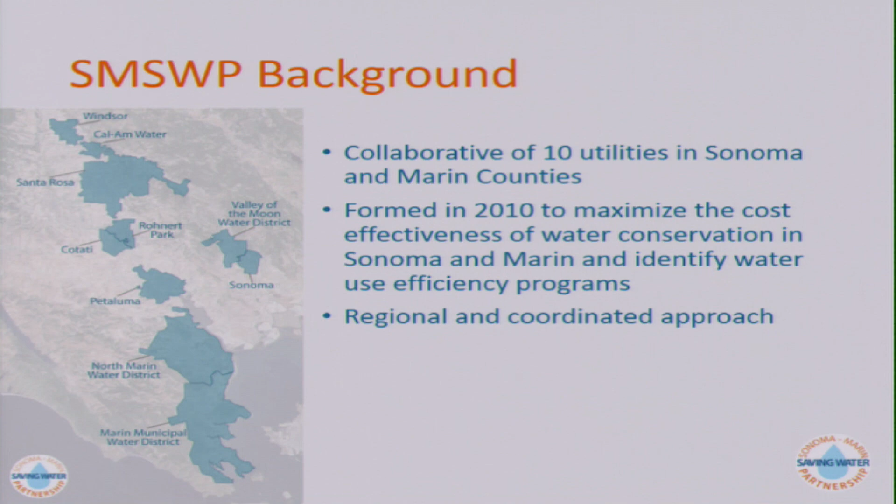And that's why we're here today with these landscape template plans, because as you know, the fires affected a great area of Sonoma County. So people in the California American Water District area, as well as Valley of the Moon, in addition to Santa Rosa, have use for these templates.

Our landscape template goals are to support our community to recover from the fires and also to create plans and specifications that are cost conscious, because we all know that your insurance and coverage and things like that are not going to cover everything. We want to make sure that the landscapes comply with WELO, the Water Efficient Landscape Ordinance.

We want to encourage Russian River and Bay-friendly sustainable landscaping practices. And we also wanted to provide design options for green infrastructure elements, such as stormwater management, rainwater harvesting, gray water, laundry to landscape, etc. And we also want to increase the number of water-efficient landscapes in Sonoma and Marin counties.

So with that, on today's agenda, we have some presentations. We'll have a presentation with Ann Baker, who is the landscape architect who designed the 8 landscape templates. We will also have a presentation from Sean McNeil, who will go over some details on how to modify the plans, and we'll also have a few words from Gabe Osborne from the planning department about the plan checks that are available here today.

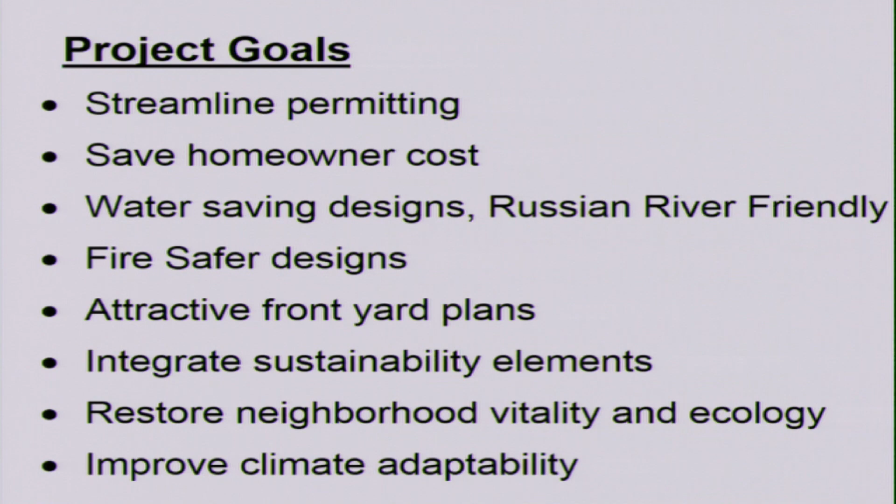As Brian mentioned, these were our project goals. One thing I want to add is that all the designs are fire safer. We were integrating sustainability elements to restore neighborhood vitality and also improve adaptability to climate change.

With reference to that, what we see coming from research with regards to local climate change is warmer conditions in summer and winter, and the North Bay region becoming more arid, meaning our dry season is longer, and rainfall likely to be more variable and flashy, so maybe more intense storms, more flooding, but then also more periods of drought.

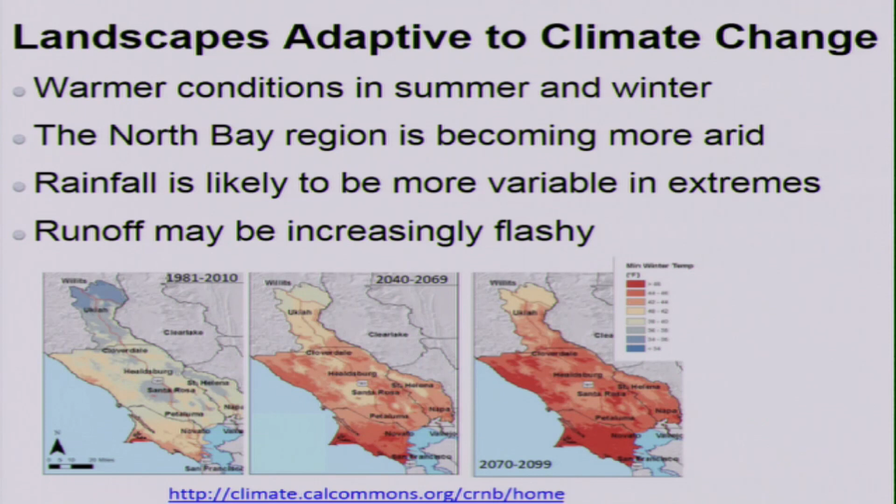So when we do sustainable design, we back up and look a bit at the social historical context and the ecological context. I'll give you a brief example of how we do that. We look at the period of neighborhood development, soils, drainage, impervious cover, and the characteristics of the existing urban forest. Going forward, we want our landscapes to improve on these statistics.

Here's a graphic of Coffey Park, and the blue is houses, which are impermeable surfaces. Red is road, and buff is other paved surfaces. Overall, Coffey Park was roughly 60% impervious, meaning that rain couldn't penetrate into the soil water bank.

Is everything okay? Yes. Okay, thank you.

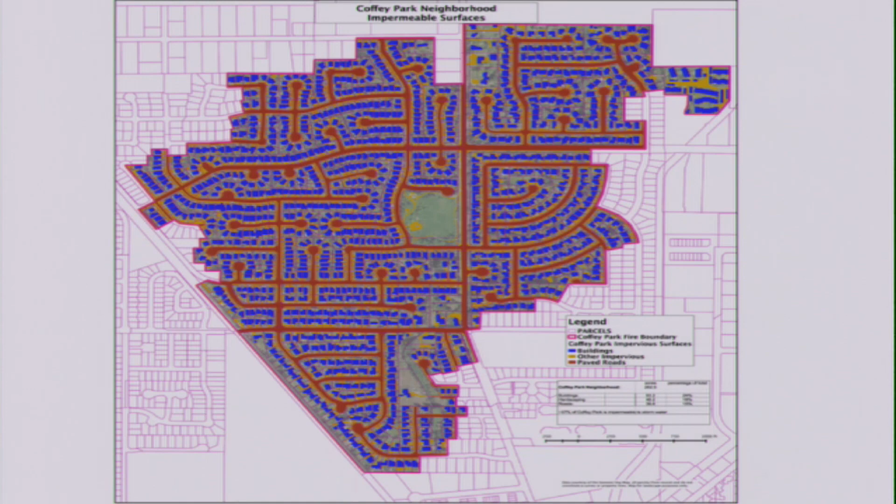The key point is that within 5 feet of the house, you want plantings to be under 3 feet tall and low fuel. That's a little opposite from the kind of foundation shrubs which are more typical in previous landscape designs.

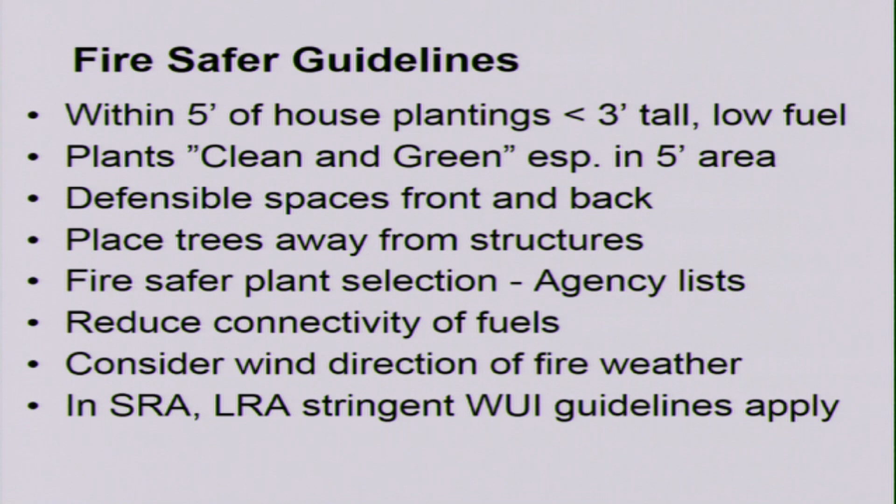You have a clean and green landscape palette throughout your site. You're looking at defensible spaces front and back, and pulling trees a little bit away from the structure so you can avoid having them overhang your roofs, reducing the connectivity of fuels, and thinking through fire weather in this community.

The sustainable design elements that we looked at in particular were permeable paving, disconnecting downspouts and paving so we didn't have downspouts running directly out into the street and into the storm drain system, and we used rain gardens and swales in order to bring the water down into the earth and bank it into the soil.

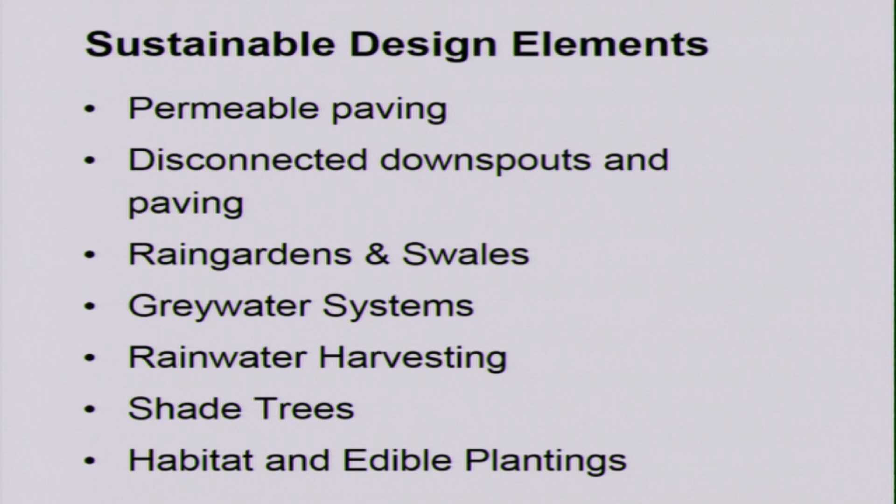We introduced two types of gray water systems that could be adapted into your properties, and have a rainwater harvesting sample detail, and we have shade trees and habitat plantings.

So this is the general approach to treating water on your site: you try and slow it, spread it, sink it, and bank it in the earth.

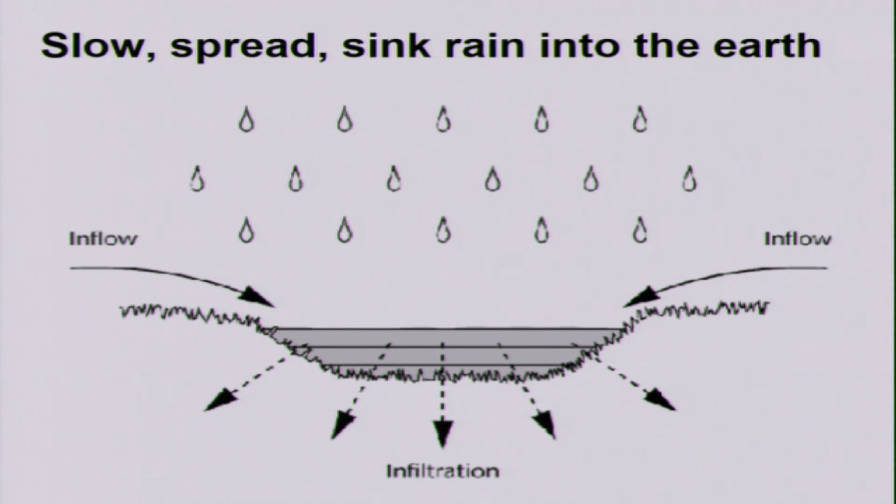I should say this slideshow is available in a PDF, so you don't have to take notes. I'm just going to zoom through everything and try and let you know how we arrived at the designs and the important components for you to consider for your own yards.

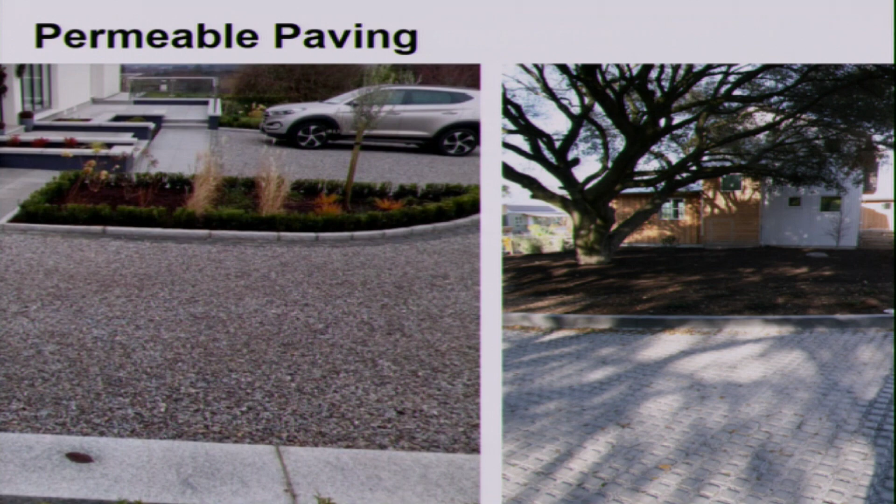Here's some examples of permeable paving. It's an aggregate paving system, with a plastic cell underneath, but you just see the gravel on top. This is a different type of permeable paving with small concrete cells filled with gravel. Here's a unit paver driveway, and in the back it has just a gravel area. So you can use different types of permeable paving on your site.

Here's a sample of the simple laundry to landscape gray water system, a diagram from the Santa Clara Valley Water District. I have this system at my home - it's awesome, it waters all my fruit trees, and it's very simple to operate, coming right out of your laundry.

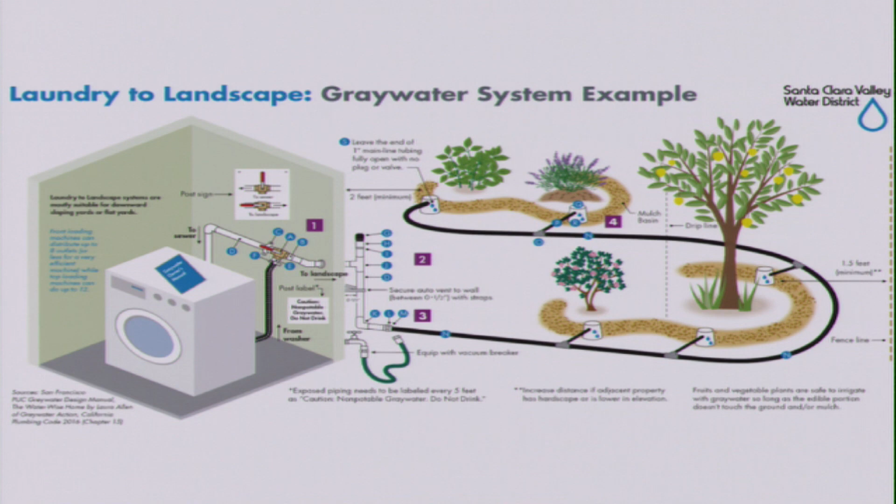The specific landscape permit requirements that the templates need to meet are - the main one is that the front yard needs to be less than 2,500 square feet.

Every yard needs to have smart irrigation controllers with a weather sensor, so they're turned off if it rains, and 75% low water use plants. All the templates have drip irrigation systems, which are easy to expand and contract, so they're easier to work with, and owners self-certify and simplify the inspection.

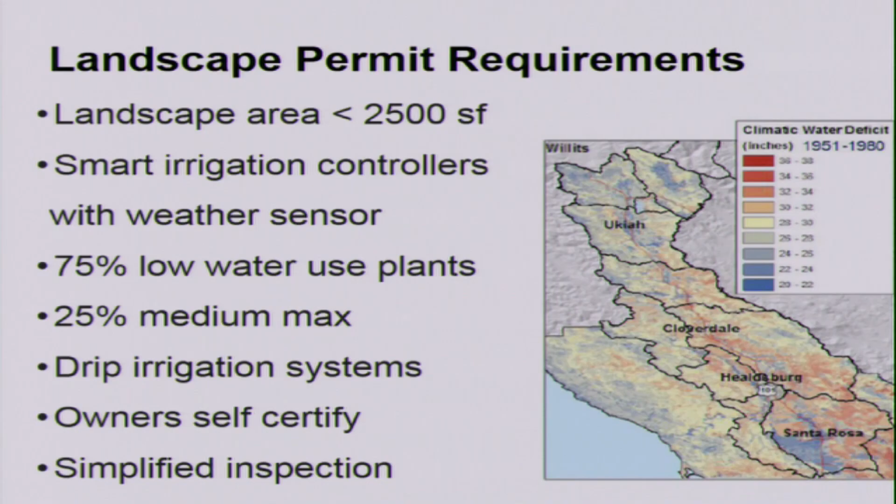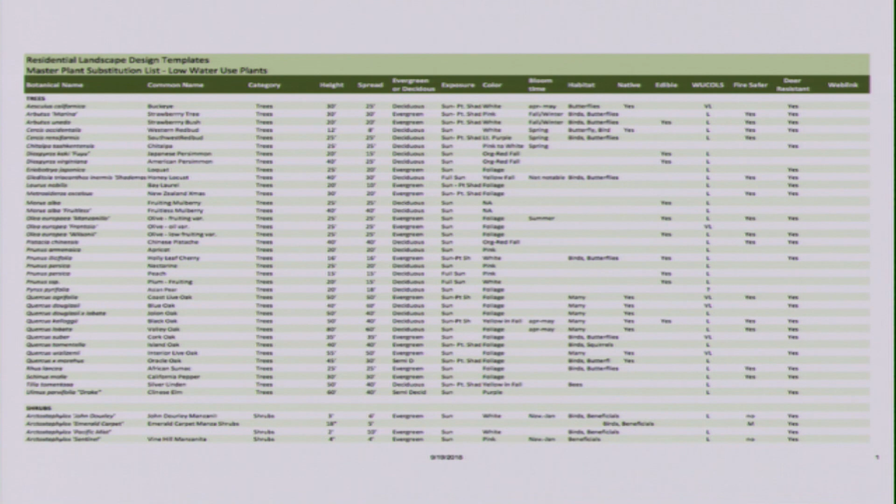Here are the 8 styles of gardens that we created that are on the Sonoma-Marin Saving Water Partnership website, and you can select the concept plan, the design template, and the cost opinion.

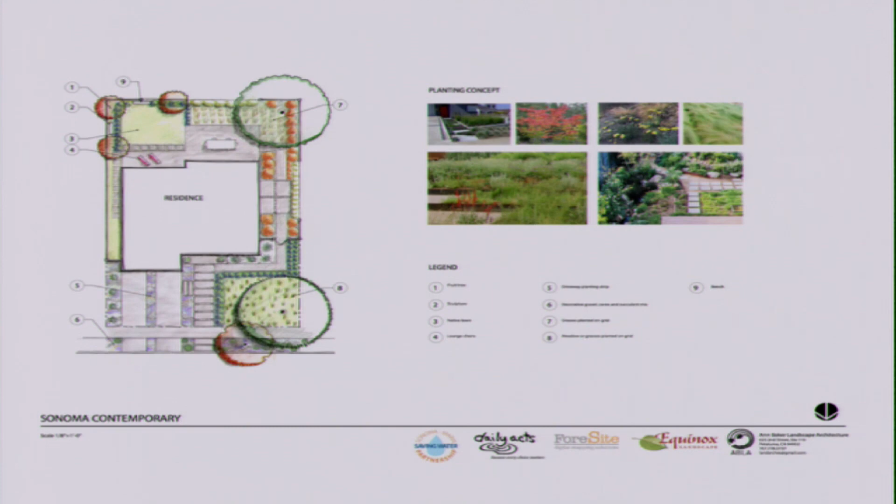Here's some examples of the plans themselves. This is the contemporary with clean lines. Here's a native adaptive, with more curving lines. There's a pollinator garden and a bird habitat garden.

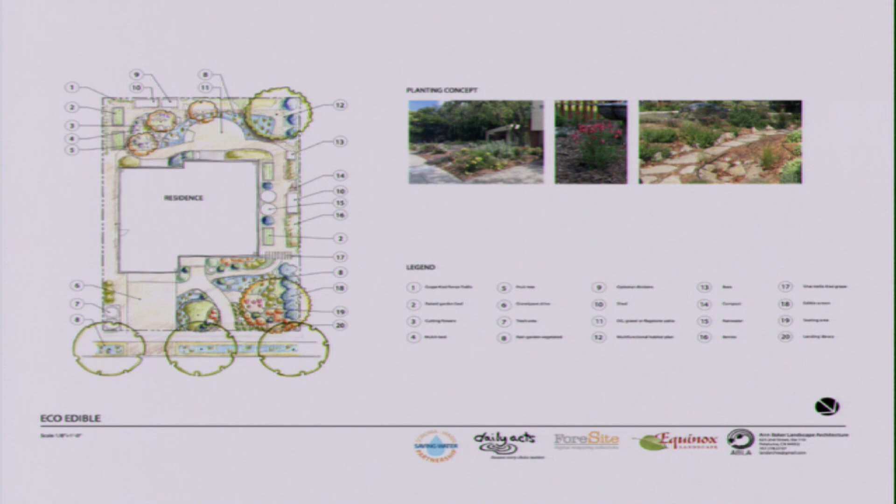All of the designs have rain gardens on them. This is eco-edible - there's the rain garden there and another one there. This is the cottage style, which has more swaths of color and a more traditional design.

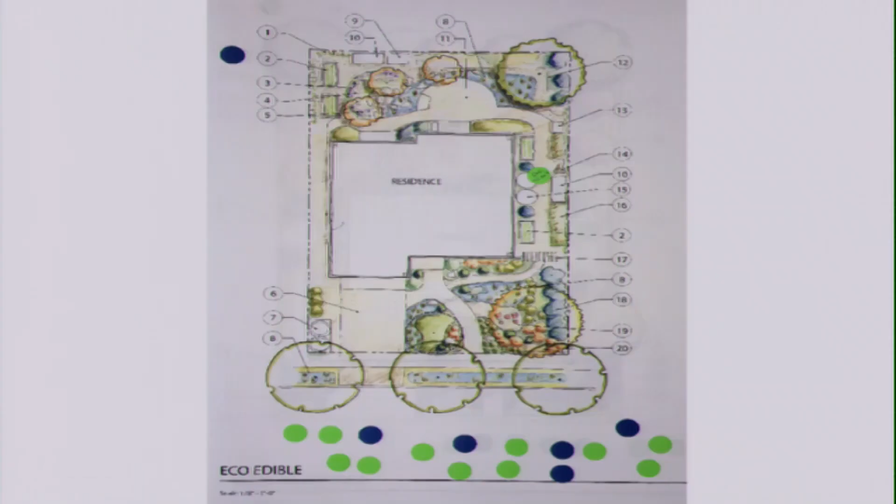We vetted all these concepts in community meetings. So here's the first one - we did a presentation, got people's feedback, and sat around the table getting their feedback on the specific designs. We had people put dots on things that they liked in green and blue, and things that they liked but found difficult to implement, where they wanted support implementing. So that's all the feedback we got.

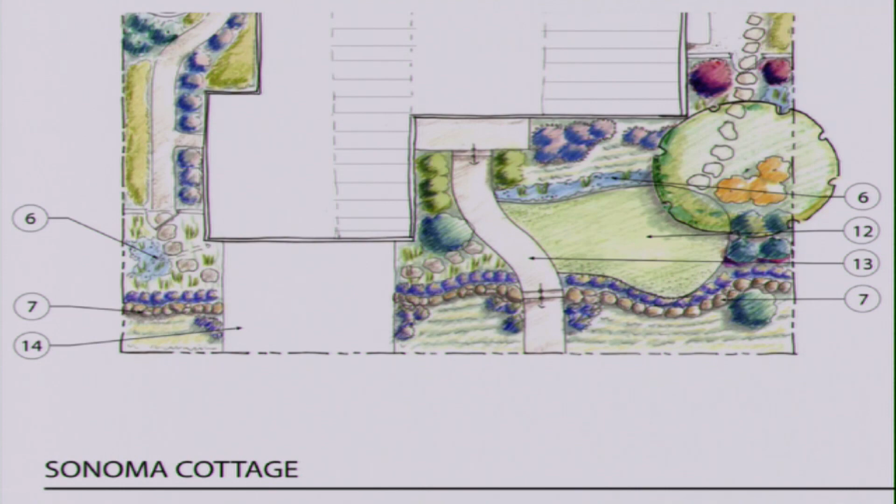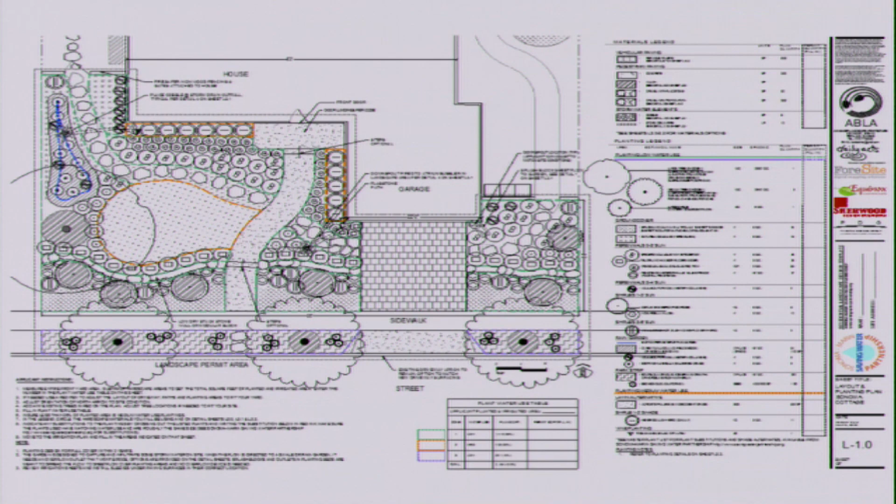The templates are flipped, so if your driveway happens to be on the other side, you can use a flipped version. And then the second drawing is the irrigation drawing. This one also has the same summary water use table, and that's the main thing you need to fill out on both these pages.

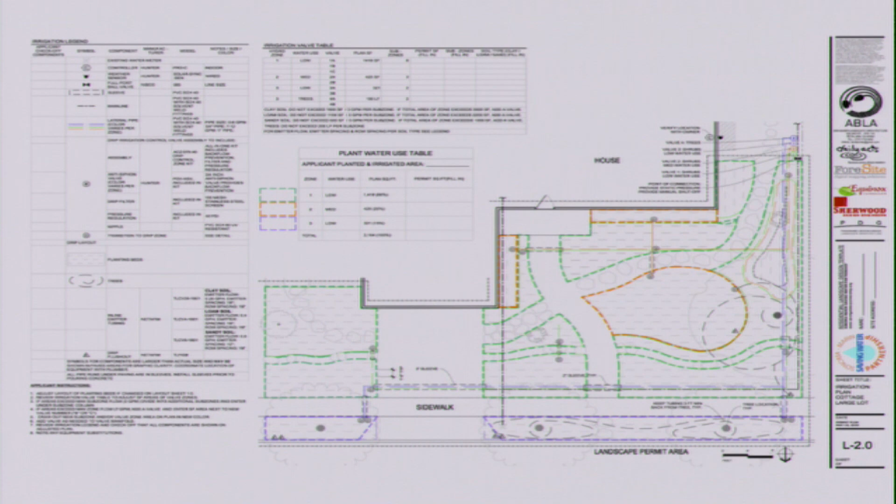You would adjust - Sean will go into this in more detail - but the outline of the hydrozones, the low water use and moderate water use areas, are adjusted to fit your site, and it shows how you use the drip irrigation for the trees. There's a whole list of drip irrigation components that are specified for you, but you can also use 'or equal.'

I'm going to zoom through this because it's not that exciting, but it's all the details we've provided for you that are meant to save you money and help ensure you get a quality installation from your contractor. So you'll have details for irrigation, details for planting, details for paving and for rain gardens - how to build all this stuff. So even if you find that the template doesn't fit your site perfectly, you can still use all of these details, and they'll save you time and money and help ensure you get a good quality installation.

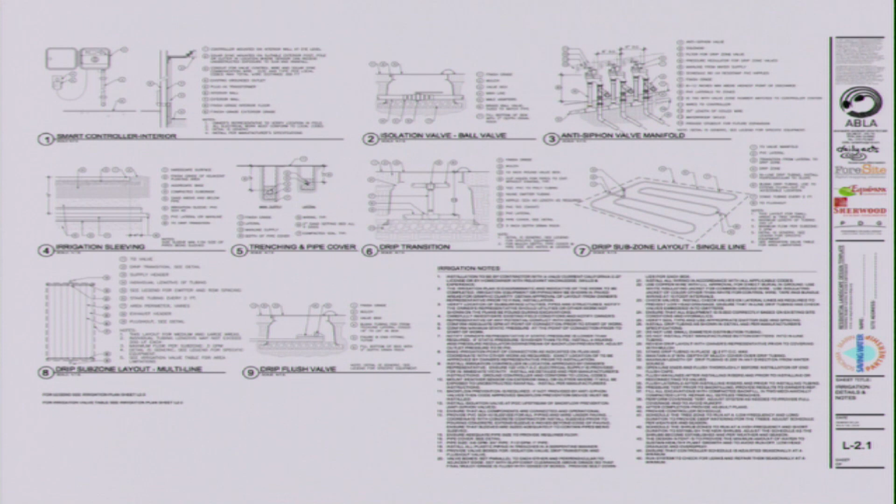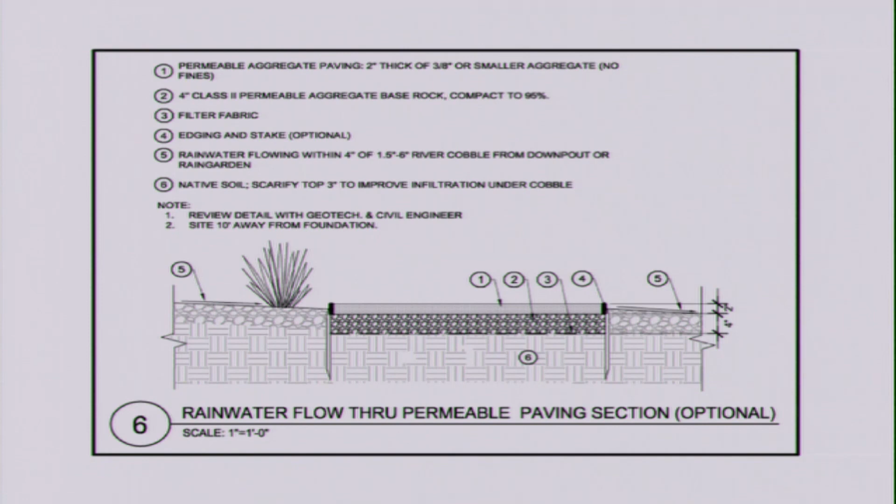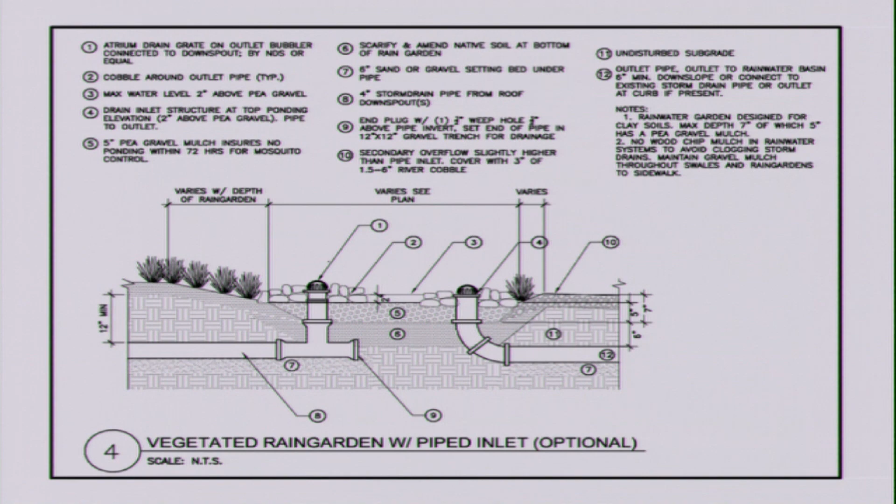This is kind of an option for doing overland flow. So you could do a splash block to a rain garden, and it'll flow through a permeable path. Or you could take your downspout into a pipe and have it pop out in a rain garden with an atrium bubbler, and then take it again into another atrium bubbler, down into another rain garden. There's stabilized aggregate details.

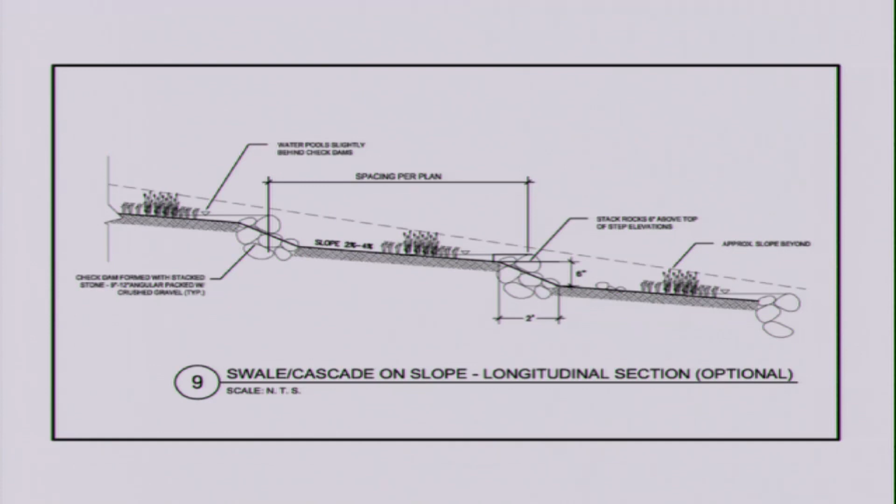There's a drainage sleeve through any type of paving that's specified, so that's something you can just buy off the shelf and put in your site where you need it. There's how to build the swale on the slope, and paving details for your driveway, like this gravel paved one, which was the first aggregate paving I showed for the driveway.

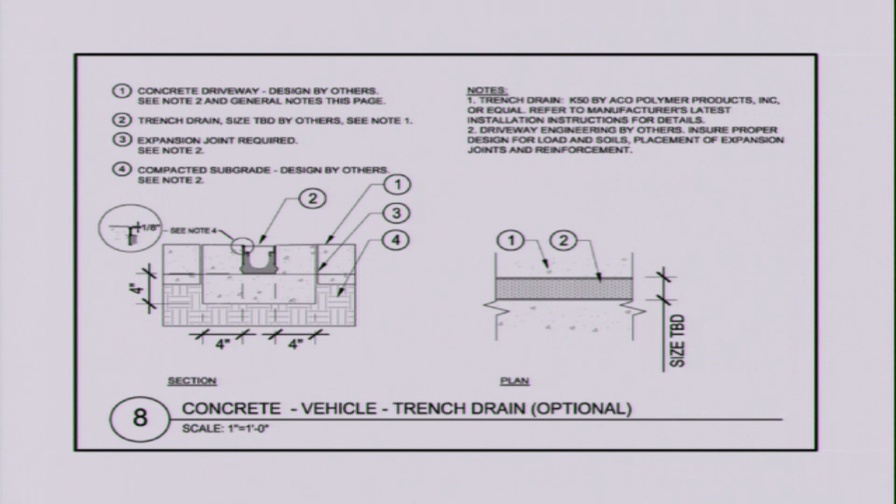And if you already have a concrete driveway but you want to harvest some water off it, you can use this trench drain detail to take the top half of your driveway and put it into a trench drain, taking it over into your landscape.

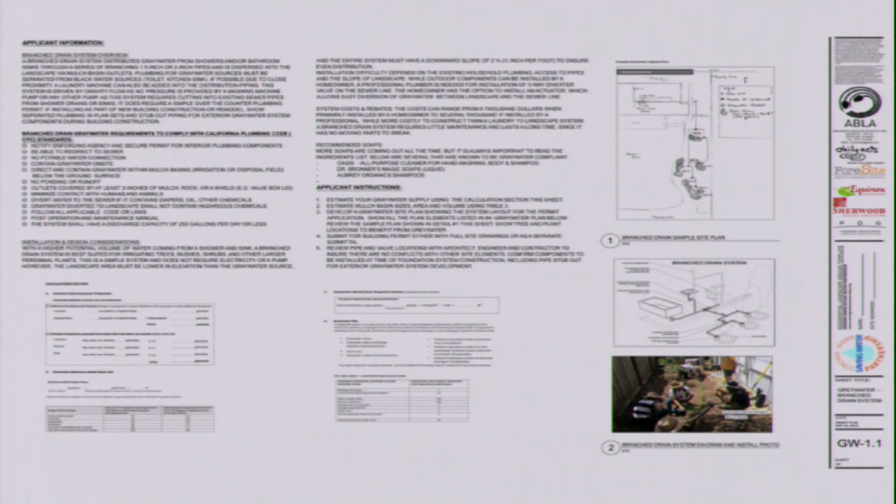So there's a lot of details here for you to use: the rainwater harvesting one, the gray water, and the branched drain gray water. Those are all the templates that you can choose from. And that's pretty much my presentation.

We're going to look at this workshop schedule, but now I'm going to introduce Sean McNeil. He's going to come up and tell you in more detail how to adapt the templates to your site. Thank you. All right, thank you, Ann.

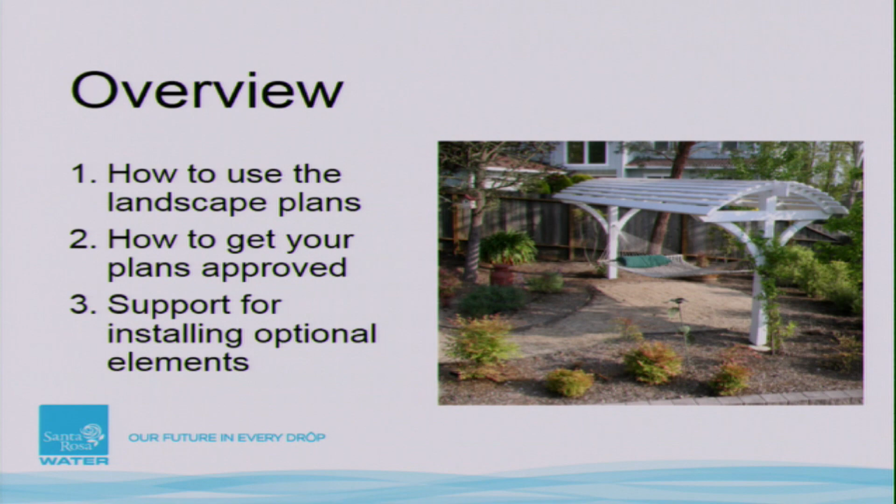So today I'm just going to go over a few things. I'm going to walk around a little, I don't want you guys to feel left out, so I have a microphone so you could still hear me. We're going to talk about how to modify the template drawings for your shape and lot size, how to expand or shrink the plans, and how to adjust the plants.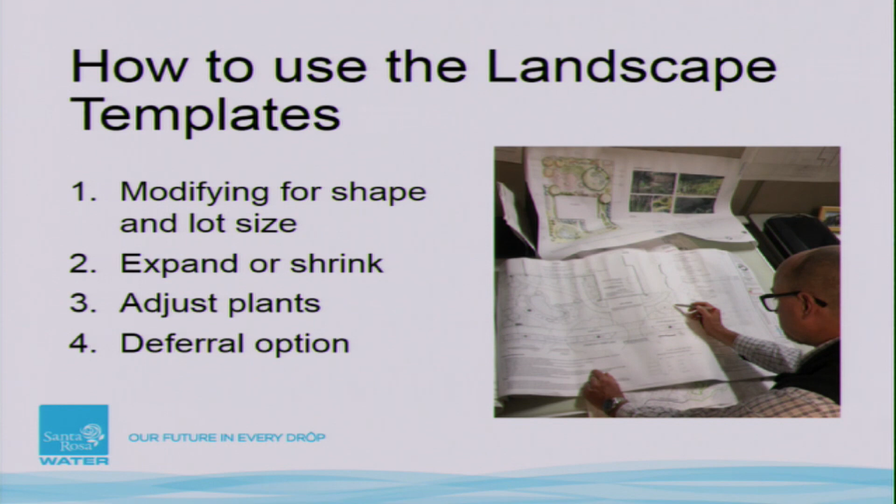And then I'll go briefly into the deferral option for those of you who are in the City of Santa Rosa. It's a specific option that we're providing for people who want to be able to move right into their home. So I'll talk about that towards the end.

So the first thing you want to do when deciding to use the template plans is pick the plan that best fits your aesthetic. Try to avoid just picking the plan that looks the most like your yard. It seems like that would make the most sense, but it's not, because you want to use the design that is what you want your landscape to look like.

If you start there, then you're going to start with the best design, and then we're going to help you figure out how to adapt that design to fit into your landscape shape.

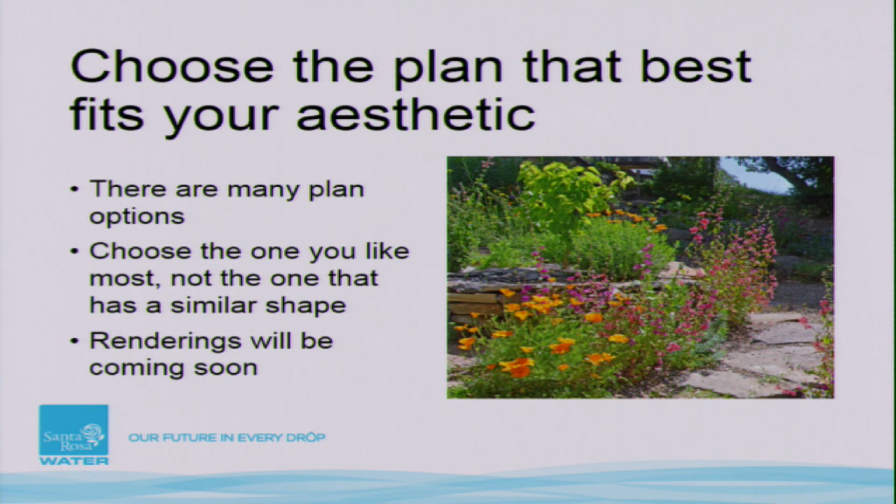We will be having renderings coming soon. I know for those of you who are going to be working on your plans today, you'll have already chosen which design you want, but we'll have renderings—these will be 3D or two-dimensional pictures of what the landscapes fully installed will look like.

So when we use the templates, the first thing you need to do is print out full-size sheets of sheet L1 and L2. That's 24 inch by 36. L1 is the planting plan, and L2 is the irrigation plan.

Then, if you want, you can print out the other full-size sheets as well, but we've also recently made available on the Saving Water Partnership website the 8.5 by 11 details, and you can print those out.

And so those you'll need, and you'll draw in any difference in the lot shape and add and subtract features to complete the design.

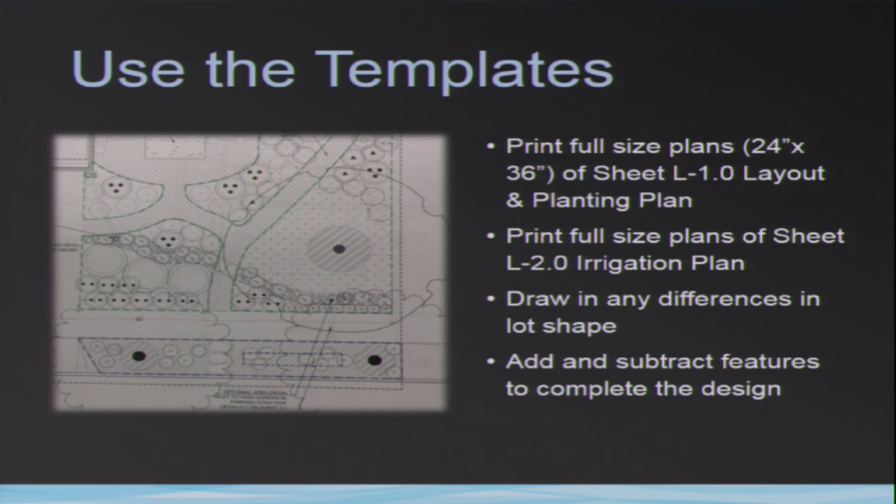So to expand the plans, this is the most critical step. If you're going to expand, shrink, or change the design to use this pathway for compliance with the Water Efficient Landscape Ordinance, the state requirements, you have to have...

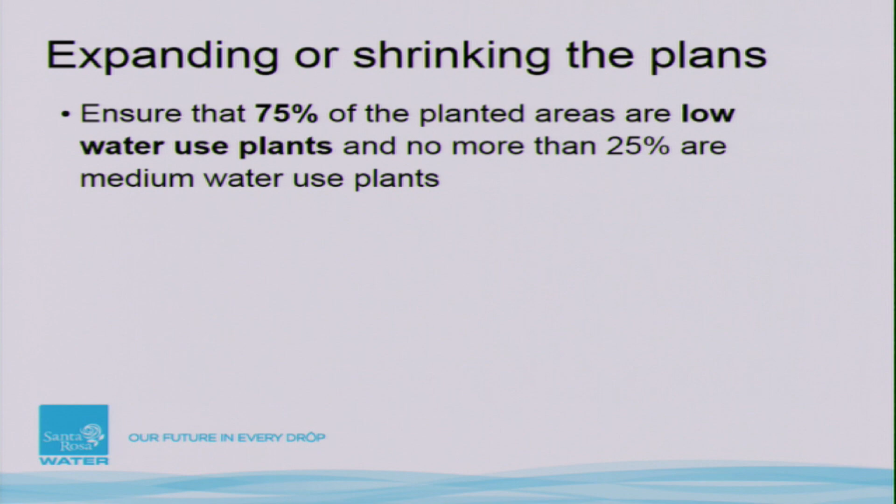75% of the planted areas have to be low water use, and 25% could be moderate. So any changes we make, we need to come back and make sure we're keeping that in check. And the plans, as they are designed, all meet that criteria, so we just want to make sure any changes we're making maintain that.

So what we'll do to make sure of that, we'll calculate the landscaped areas for each zone, each area, and fill that in. The full-size plan sheets have tables where you put the data, and it's real simple to just follow through—it's almost like a 1040 EZ form.

Another thing these plans do is make sure that if you follow them, you're not going to exceed the capacity of the irrigation system through your design. We have that all built in, and if you just follow the steps for any changes you make, you'll have a real simple way to build your landscape irrigation that won't fail.

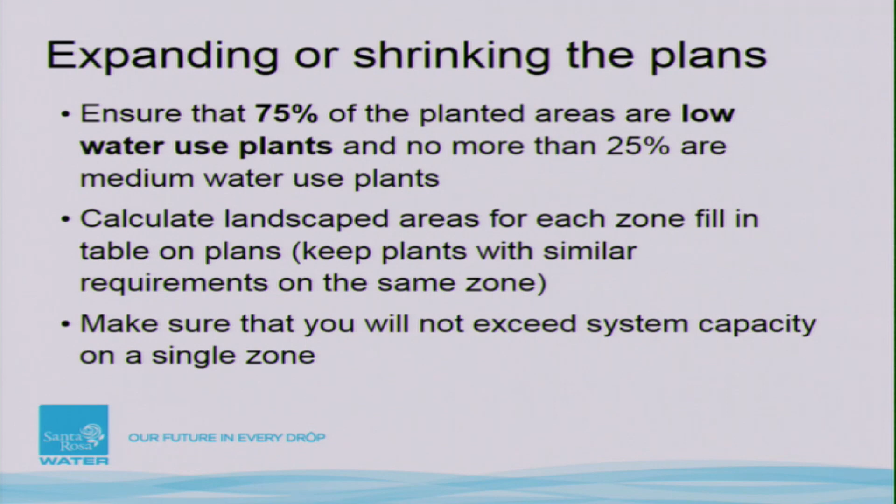So when we modify for shape and lot size, here's an example. I've changed the lot shape, using a red pen so it stands out more on screen. Now I have more of a pie wedge shape. See that pie wedge shape? And I removed a bunch of plants because they're no longer on my property.

That makes sense, right? I had to remove those plants, so I just X'd them out. I have a tree here, on the border of my property, so I just moved it over and drew that in. See my round circle there with the dot? That's my tree. I moved it over, and that'll stay there.

This pathway that was drawn here, I took that out—it wasn't going to work for me. So I X'd it out, made that really clear. That's a very clear example of my intention, and that's how you can modify the plan. You can turn in something with that kind of markup showing the changes to the template drawing and what you're going to do.

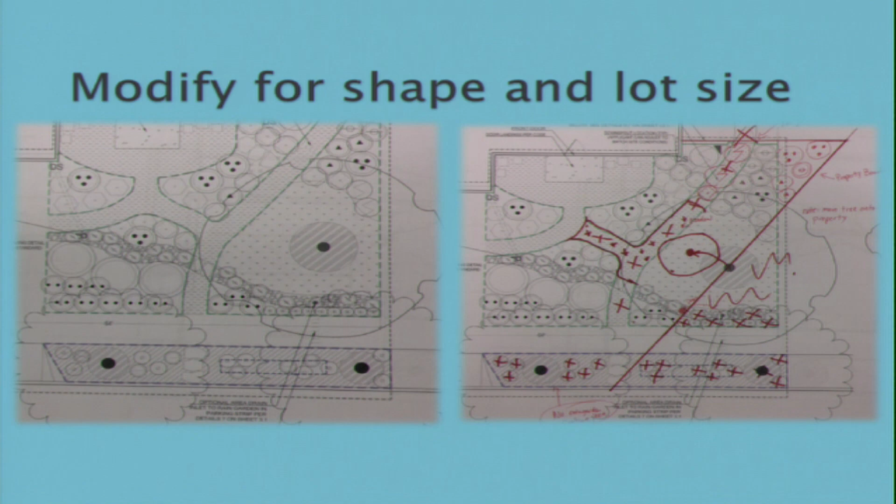Over in this area, you can see I've added plants. There were some plants in the design that I liked, so I added a couple more in that area, and X'd out the ones that were there originally in the simple plan. We'll come back to this example again when we look at the irrigation plan—I'll use that exact same example.

If you do change plants—I don't necessarily suggest you do—but if you want to, it's really important that low water use plants get swapped for other low water use plants. It's critical that you get similar types, so you don't want to swap a ground cover for a tree. It wouldn't really fit within the design, so you want a similar type plant for any swapping.

Things that can change: maybe when you readjust for the north arrow, the plan you chose is more full sun, but you want something similar with more shade—you could use the plant list for that. Or if you like a different color, you can change it for that. Ultimately, when you go to build these, if the exact species isn't available but there's a similar one, you'll write that in on your as-built, making sure we're using the same water use factor for these plants.

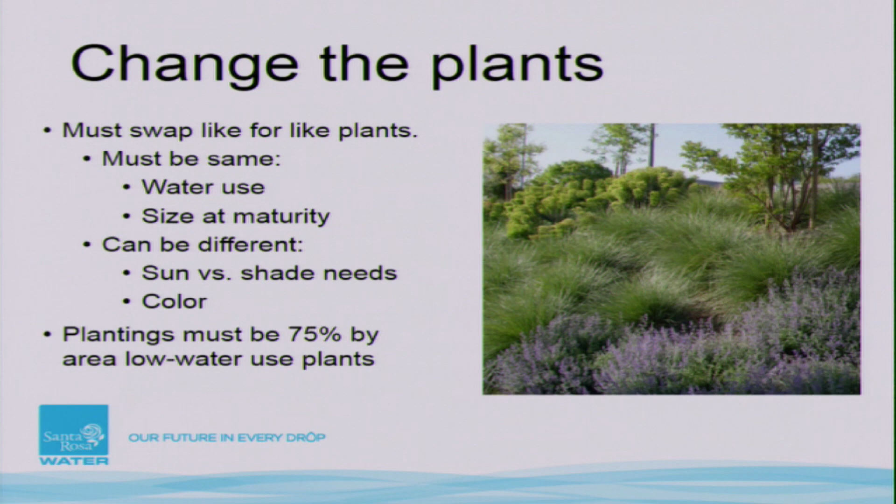Once again, because it's most critical, I'm going to repeat it: plantings must be 75% of the landscaped area when we're done, and must be low water use.

Anne talked briefly about the plant lists—these lists her team put together are incredibly powerful. There's a low water use plant list and a medium water use plant list, broken out into tree, shrub, grasses, etc. They also tell you exposure, what type of sunlight the plants need, and show color and size at maturity. These are all really important factors when figuring out which plants to substitute in.

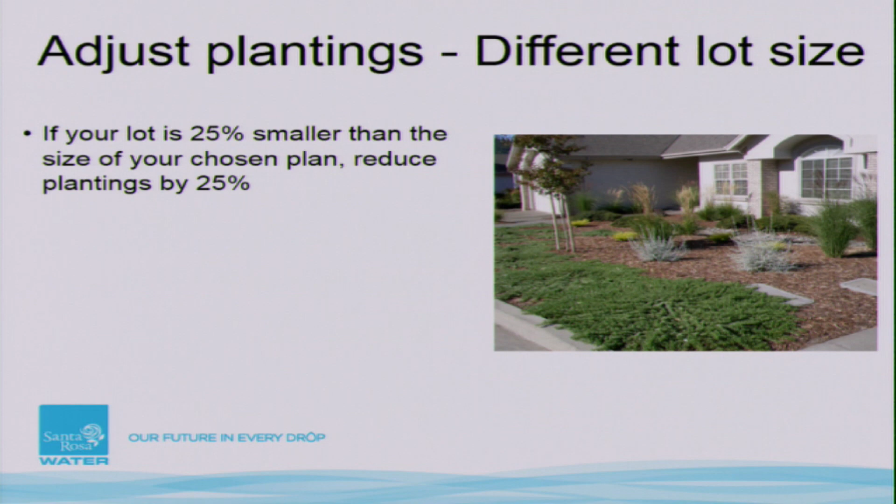And there's much more on the list. So when we adjust the plantings for different lot size, just a rule of thumb: if your lot is 25% smaller, you're going to decrease the overall plantings by 25%. If it's about 10% larger, you'll increase your plantings by about 10%.

But I also want to speak for those of you in the city of Santa Rosa. There has been concern that some of these plantings might be a little too expensive, and ways that people could cut back on costs would be to reduce the overall percentage of plants in the landscape. So you can take up to a 50% reduction in the number of plants you install, but you're going to do that not by broad number, but overall density of plants, so you can't take out all the big plants and leave little ones.

This is a little more challenging on the maintenance end. It may be savings at the installation phase, but eventually all those open spaces will be places you'll have to weed. Whereas if you plant the densities in the plans, they'll self-fill in and you won't have to worry about weeding as much later as they mature. So though this is allowed, I would still suggest using the full density. The savings isn't that great overall with the cost of things for the number of plants, especially if you have a small yard.

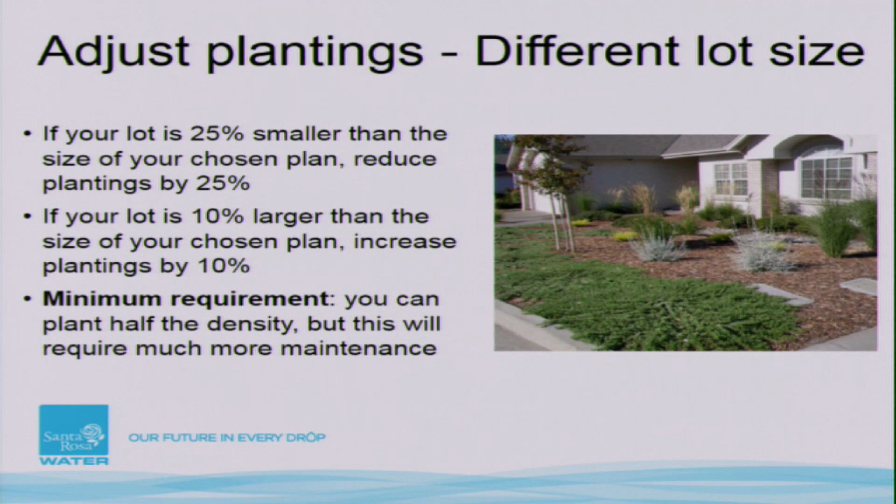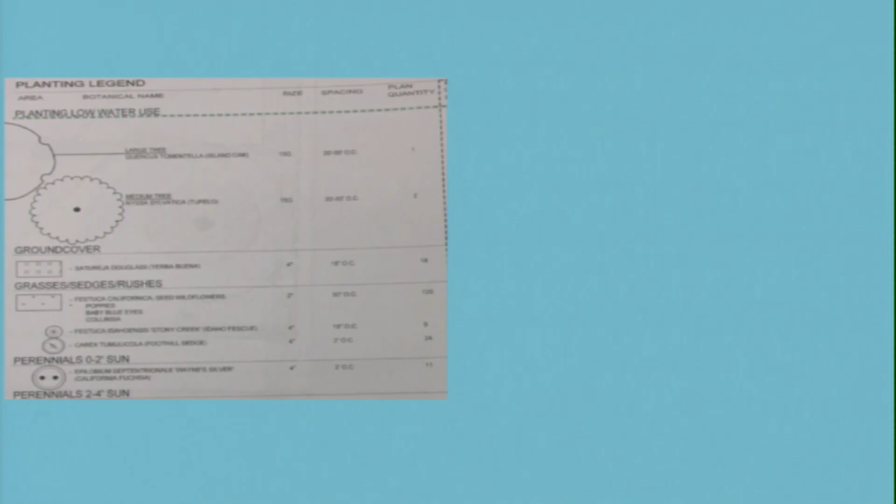Something to think about. Just reminding you of this change we made before I move into the irrigation plan. Oh, and the tree plant list.

So on the planting plan, I told you I wanted to make some minor changes. This might be hard for you to see, but I had here an island oak, and I changed it for a valley oak, just because I love the valley oak. I changed it out for a valley oak, and all I did was write the name in and put it there.

Also, because I had some plants in the plan that, when I redrew my plot line, were not even in the plan anymore, I just scratched them out completely—just a red line right through it. You see that over there? Just a red line right through it. And for others, I just changed the number because I had a smaller area where those plants were kept, so I reduced the number.

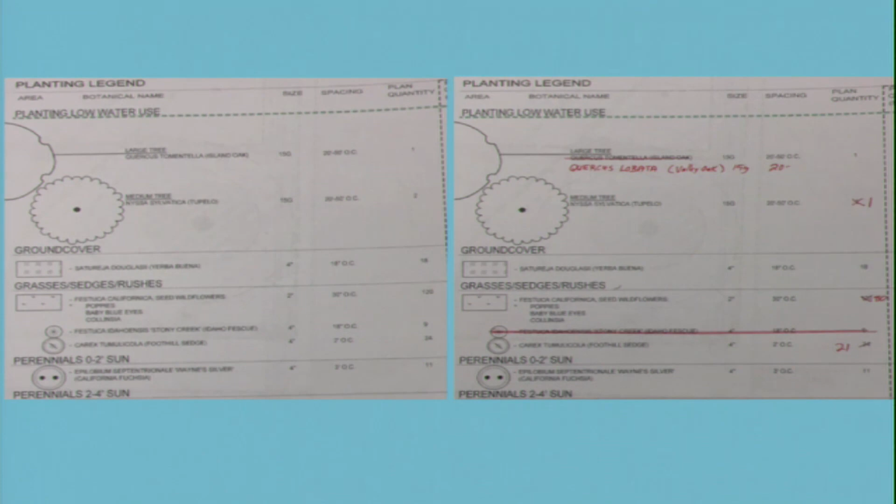Now I'm going to adjust the irrigation plans. Getting back to this example, this is the planting plan adjustment. Now I want to look at the irrigation plans, and here's that path. What I've done is in that path area, I've put the same symbol as this meadow area. That tells you I'm planning to continue the meadow into that area instead of having the path, because I wanted to maybe have some stepping stones, not a full path, to the backyard. I like the meadow look, and walking through a meadow sounds nice to get to the backyard. That's how I wanted to do that.

Also, I want to point out that I have these sleeves here. Originally the sleeves were over here, out of the property. Sleeves are pipes under hardscape that allow me to fish other pipes through them, so I can put my irrigation underneath hardscape. So when you don't have the hardscape in, that's the right time to put sleeves in. I have sleeves there, a sleeve through the pathway here, and a sleeve through the driveway.

Usually it's a larger size PVC pipe, 2 to 4 inch, depending on how many pipes you have to fit through there. Any time you need to get a pipe through hardscape, or if a pipe breaks at some point, it's a lot easier to make changes if you have them in a sleeve versus just direct burying them under hardscape.

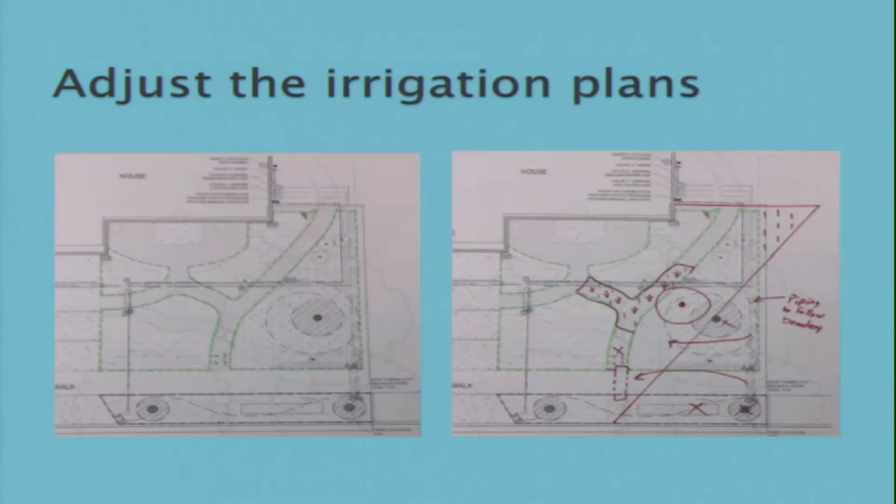The other thing I've drawn in are these. I moved the controller, it was right over here, and I moved it into the garage. I'll show you guys that. So the controller is in the garage, but I had to create a wire path.

I need to get the wires from the controller to where my irrigation valves are located over here. So I put that right in the same trench where I'm going to have my pipes going, through the same sleeve, right underneath this path back to there. I've drawn that in because you don't want to move your controller and figure out how you're going to get the wires over there after everything's put in.

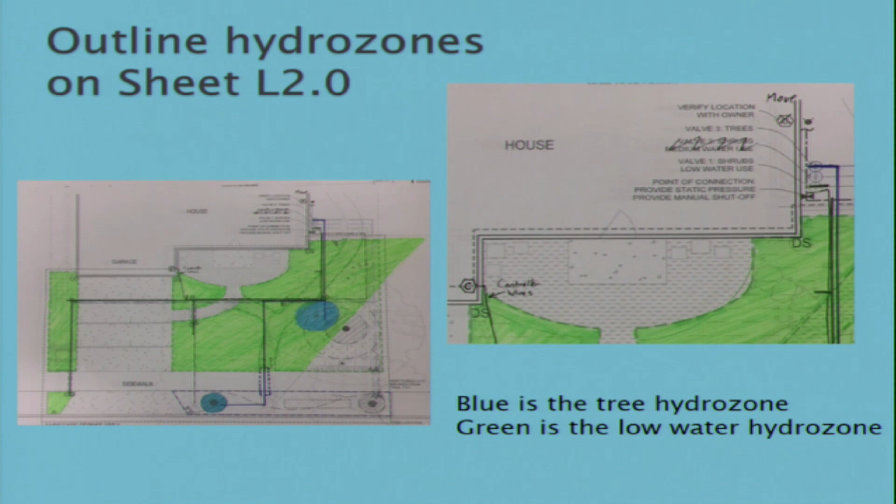And then I've also moved my pipes, and for detail, I'll show you in a minute.

So now we need to calculate the landscaped area. There are two different ways to calculate this. Some of you might already know how many square feet your front area is, and then you can use this formula. If you already know, take that total landscaped area and add to it the tree canopy.

For simplicity of this workshop, we're going to bin all the trees into categories: a small tree, you add 50 square feet; a medium tree, you add 75 square feet; and a large tree, you add 100 square feet.

And once again, we need to make sure our percentage of low water use plantings in this area is still 75%. So we take all the pathways, all the hardscape and special landscaped areas, subtract that from the total landscaped area, and that gives us our total front yard area and our landscape.

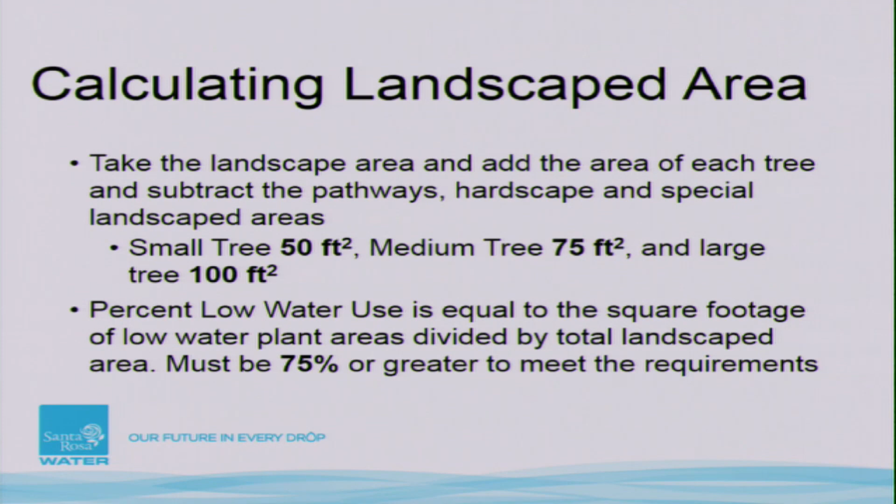So let's walk through how those calculations would look. My front area in the example I've drawn is 1,550 square feet. I have one large-size medium water use tree, so I add 100 square feet for that, and one medium-sized medium water use tree at 75 square feet. When I measure up the path and front porch, I get 335 square feet.

Then when I measure the other area, not including the trees, I have 1,215 square feet of low water use plantings. So there's the calculation of my total landscaped area. You can see the total front yard right there, 1,550. I've added the 2 trees and subtracted the hardscape and unplanted area to get a total of 1,390.

This is important because you're going to put this in the plans, and this is what you'll use to calculate how much percentage of low water use plants you have. So this is why I'm going over this. My low water use landscape is 1,215 square feet, and the percent low water use is basically this division problem times 100.

I didn't put that in because I wanted it to be—I get 87%. Medium water use trees is 175 square feet, and that's 13%. So I've met the requirements in my changes. This is a good looking plan.

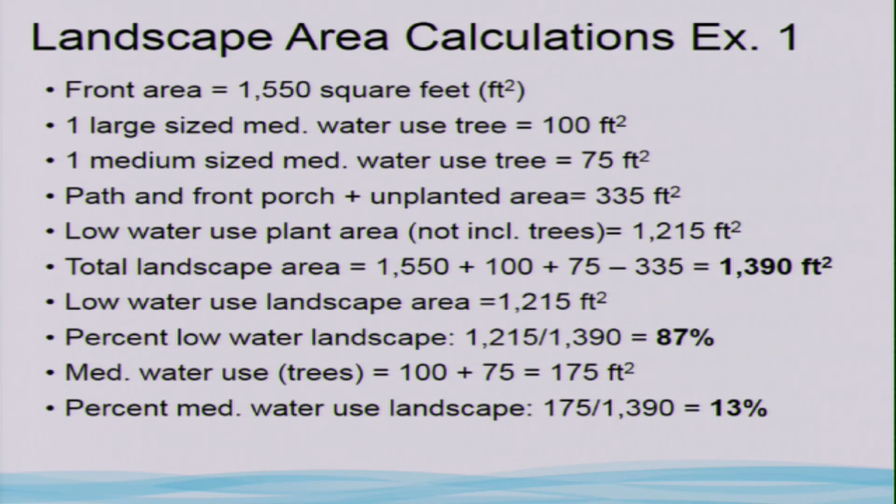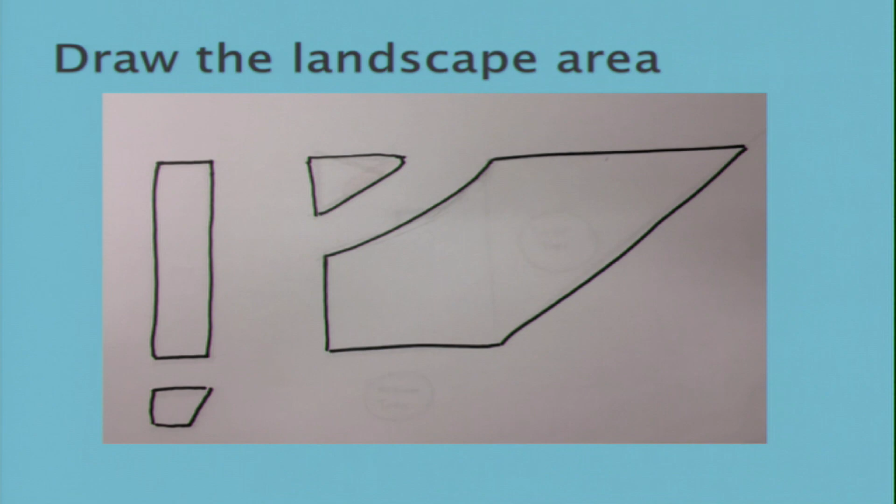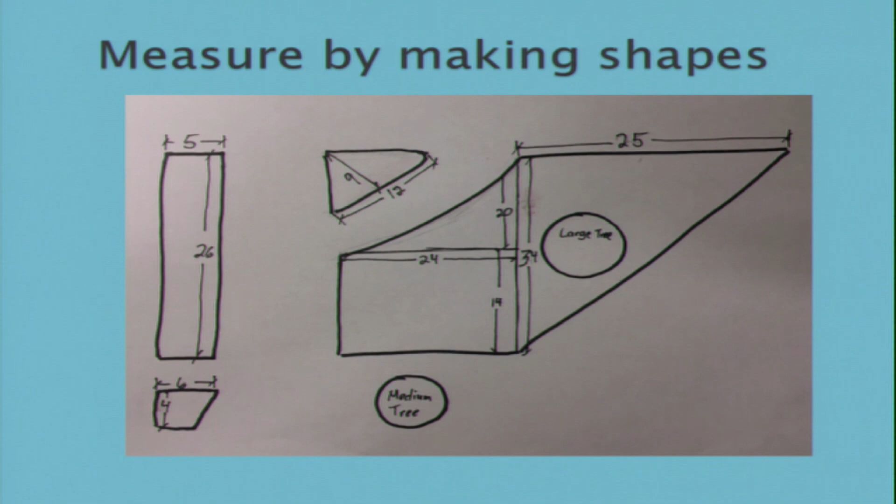Here's another way to do it. For those of you who don't know how much square feet you have in the front, you can start looking at your landscaped areas—that's what I've done, drawing out the landscaped areas in shape form. Because I like geometry, I broke them out into shapes I can measure. I know how to figure out the area of a square, a rectangle, and a triangle pretty quickly, so I've done that here.

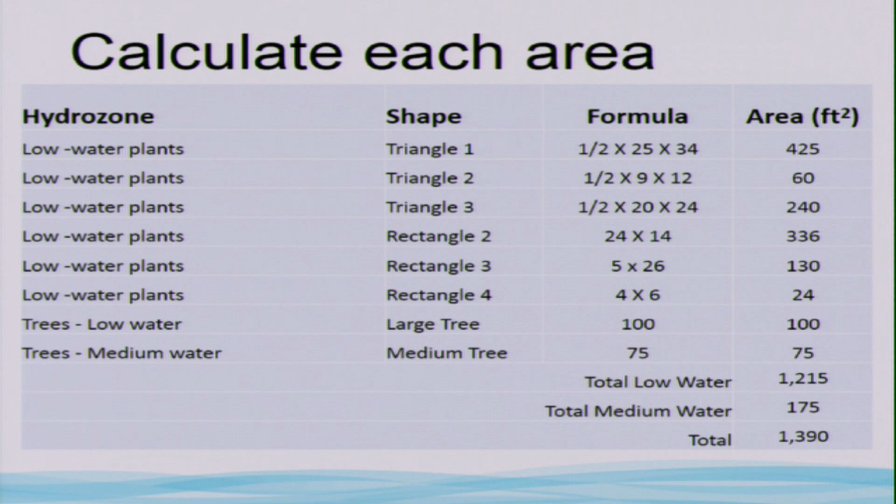Here's the calculations for that. I won't walk you through it all—you have this handout, if you want to double check my math you're welcome to. But I end up with the same number and the same percentages doing it that way. So, two ways to calculate that.

Then I go to my plant water use table, and I enter this right into the plan sheet. So the low water use is 1,215, medium is 175, 1,390 total, and I have my percentages there, just like it shows in the example of the template.

Okay, so on the template sheets, this is already there—I've just filled it in for that.

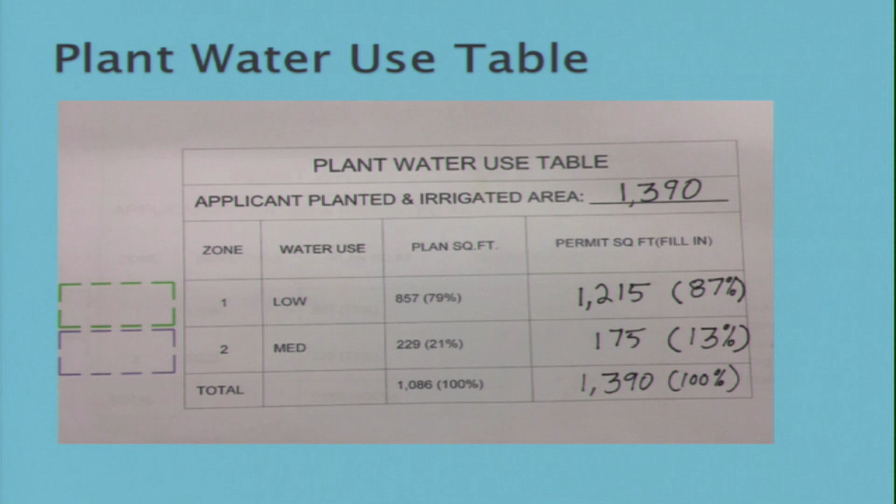What I've done also is stubbed out each area where I'm going to transition from the hard pipe to my drip tubing, because I don't want drip tubing going underneath the hardscape. I want hard pipe there. So it comes down here, and I stub out right there. This is what I told you I was going to show you.

I stubbed out in these 5 different areas. This is important because each time we stub out, we don't want to have a run of too long of tubing, because you start to lose pressure in it. We have some real simple formulas in the plan set for how many square feet you can have before you have to stub out. So I stub out here, here, here, here, and here. On my low water use planting area, I have 5 different stub outs where I'm going to transition from PVC pipe to the drip tubing.

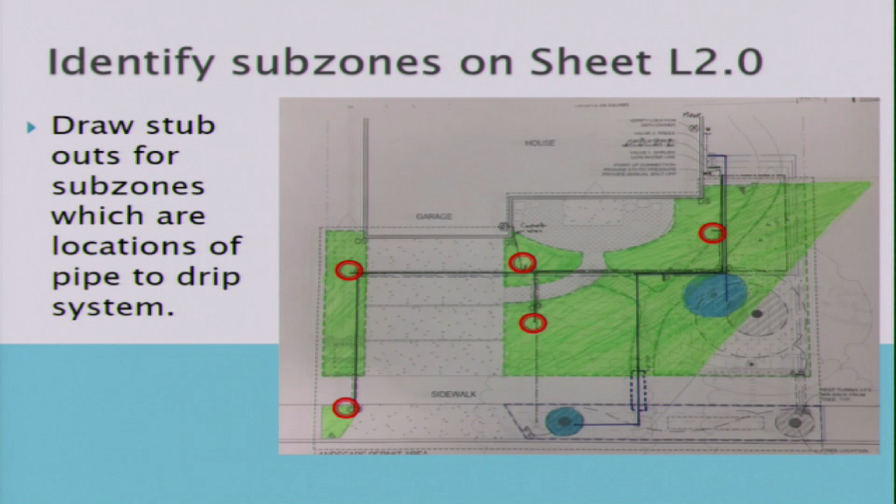And there's a part in the plans where you write that in. Those are the subzones. That goes right there.

So now I've filled out my irrigation valve table here. The low water use plantings have 5 subzones. It's clay loam, 1,215 feet. Look at this right here, what I've just circled — it says each one of those subzones can't exceed 1,100 square feet. So with 5 sections, I'm not even close to getting to the maximum capacity of this system.

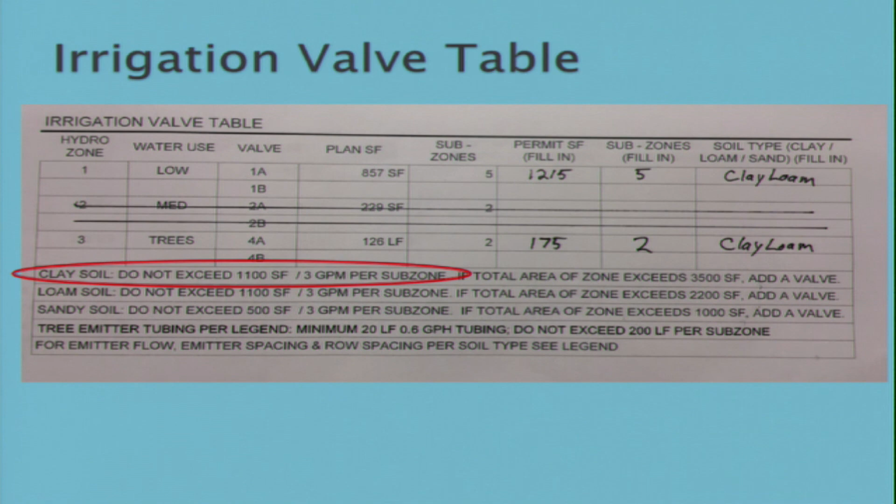So that's how you modify the plans. Now let's talk about getting those plans ready for approval.

So we have an application packet. You could either use the front page if you print out the entire plan set of the template drawings and modify those, then the application part is all in the front sheet. But for your convenience, if you just wanted to print the 8.5 by 11 version, it's up on the website, and you can get the application packet, which includes all the information on the front sheet and all the required details associated with the plans for any minimum installation.

That's one piece. So you'd have your full-size planting and irrigation plan sheets, as I talked about earlier, in this application. In the application, there are 6 steps to complete. 4 of those steps are for before you do the work, and the last 2 steps are after you've done it and ready for the inspector to come.

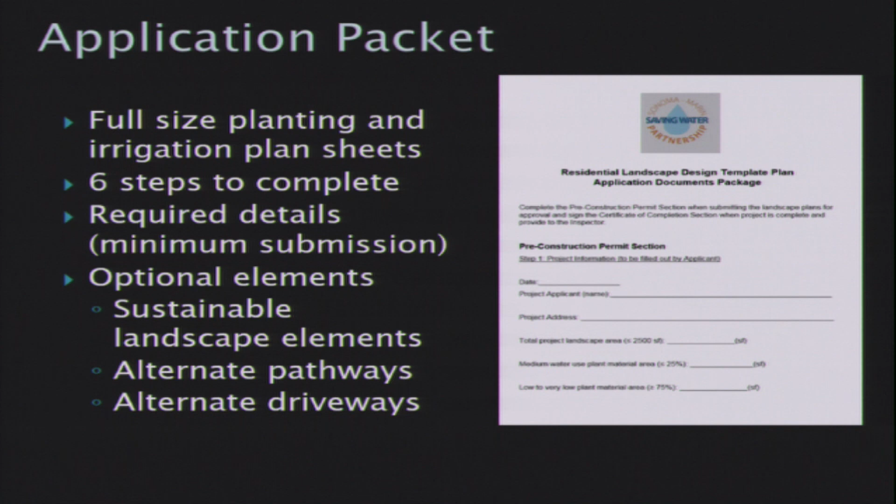So we have the required details. There's a minimum submission, and then all the details that Ann was talking about and more are also available as menu items that you can just add into your plans. If you have those optional elements in your final landscape plans, you want to print out the details that you need.

In the application, we have these 6 steps, and they're basically project information — you need to put where the project is located, the address, who's the applicant, so the planning department can contact you. There's a pre-construction agreement saying you're going to install the landscape as these plans are, and you're going to sign that, or the applicant will.

Step 3 is to provide the plans — you're going to certify that you're providing that. Step 4 is a disclaimer, because we're modifying these plans as the landscape architect, and giving these to you to use, you're basically indemnifying us that if something happens in this installation, you won't sue us. So that's the disclaimer — it's on you once you change them.

And then you want to keep a copy of everything that you submit. If you'll be finishing up your plans for review today, Gabe and his team will be in this room reviewing your plans for those of you in the city of Santa Rosa who are ready to go. They'll be able to take photos of your plan sheets, so you could take your plan sheets, but we'll have to figure out how we're going to deal with the application sheets.

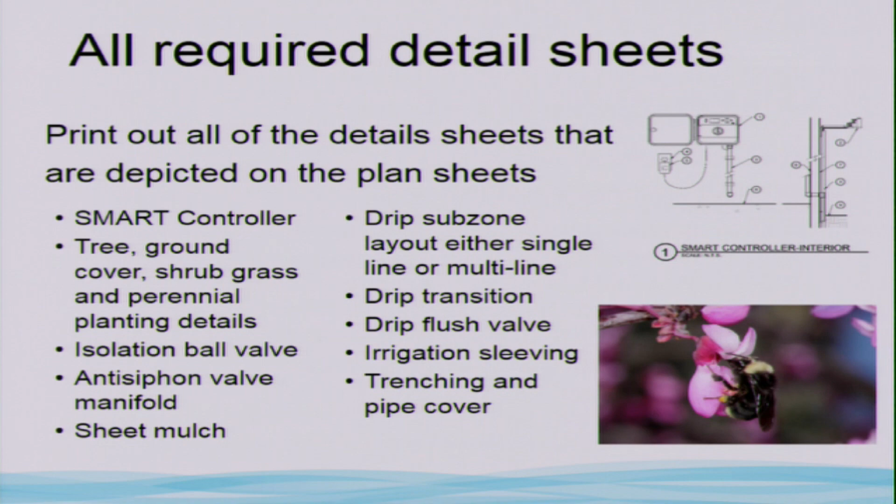So here are all the required detail sheets. I'm not going to speak to all these detail sheets, but they're in the presentation that you got when you came in today, and this presentation will also be made available online. It'll have hyperlinks in it so that you can click through to the landscape plans and other resources we're trying to promote.

So when you add these optional detail sheets, I do want to give a plug for some of these options that are in there. What's really nice about these features is it's a holistic way of rebuilding your gardens and landscaped areas into something more in tune with the natural environment.

Taking the rainwater that falls from the sky and hits your roof and pavement and putting it into your landscape is just better for you in the long run. It's better for your landscape, and it's better for water quality in the area. So instead of treating that water as a pollutant, you're treating it as a resource. You won't have to buy water that's pumped, treated, and delivered to your house to supplement as much water during the irrigation season.

As Ann mentioned, if you have these features, you're turning your irrigation system on much later in the season. You're also deep watering the soil, keeping soil moisture high, and we know that's definitely a fire-wiser way to be. I want to stress that while it may seem complicated, these are very simple, very easy to install. They're just places where water can go when it rains, and you have to do something with the rainwater anyway.

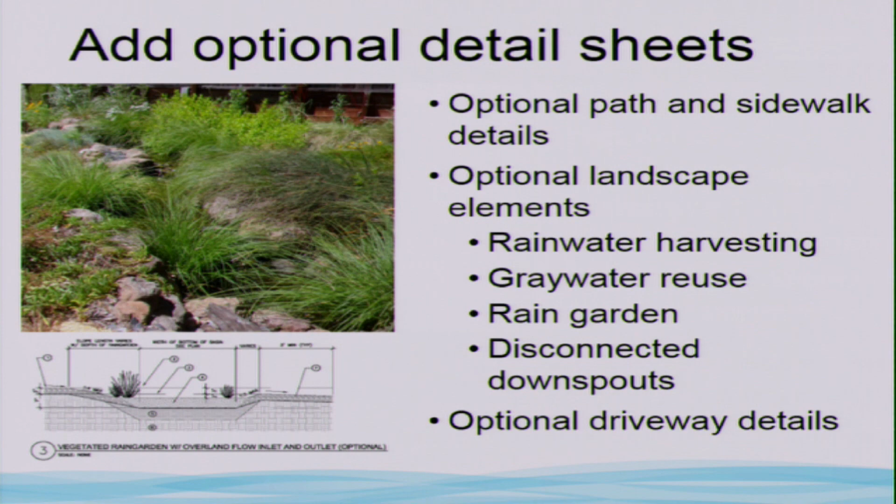We have some resources to help you install these. In addition to the free details and plans provided by Ann Baker Landscapes, we'll have some workshops coming up on October 4th with Daily Acts, where we'll talk about rainwater specifically. On October 18th will be gray water. And if you're in the city of Santa Rosa, you're eligible for rebates if you install a rainwater harvesting system, up to 25 cents per gallon. There are some program details we'll talk about more specifically with anybody who's interested. We also provide gray water rebates of $75 per fixture that you convert.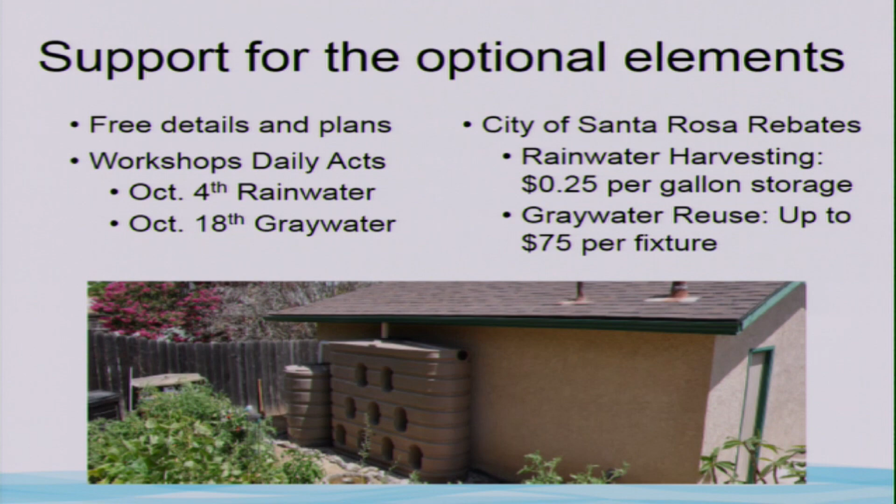So the landscape deferral option—I just have a couple of minutes to get into this. If you're choosing this option and you're in the city of Santa Rosa, you can defer your landscape implementation, planting, and installation until two years after you get occupancy.

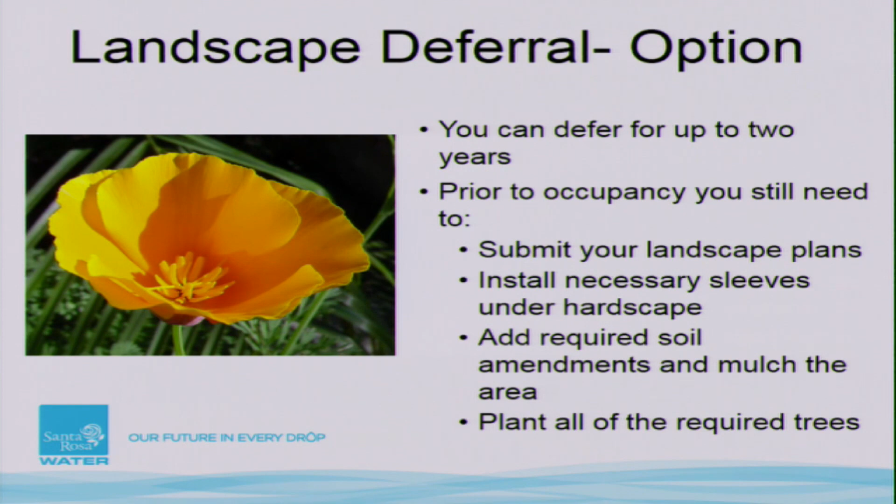But you will still need to submit your landscape plans. You'll need to install the necessary sleeves, making sure you'll be able to run them underneath the parking areas and hardscape in your landscape. You'll also need to do all the soil amendment and top dress with mulch to prevent weeds from taking over, and plant those trees. That's what would be required prior to occupancy.

So to get your plans approved, bring your landscape plans. If you're not doing it today, bring your landscape plans to the Rebuild Center and include with your submission all the items I've talked about today. With that, before we go to questions, I'd like to invite Gabe Osburn up from Planning and Economic Development to talk a little bit about what they're seeing.

Good morning, everybody. Gabe Osburn, I'm the Deputy Director of Development Services for the City of Santa Rosa. A lot of familiar faces in the crowd—I always say that. I'll keep it short. You've probably heard me ramble on up here many times in community meetings.

So I'll talk a little bit about how this fits into the overall building process, because that's the big thing—we're trying to get you back home. This is a bit of a unique element because it's one of the aspects of the building process that you can actually do on your own. You can't do structural calculations for the foundation on your own, but this gets you into something where you don't necessarily need a licensed professional to take it to completion.

So I always like to take a little poll of the mixed room. How many people are in the city limits and how many are in the county? City limits first—okay, so that's the vast majority. And of those people in the city limits, how many are actually going through the building process now? What I mean is how many have a defined plan where the site plan is settled, or have submitted the plan to the city. That's a good number as well. And out of that group, how many would be prepared to complete their landscape design today and get it completed?